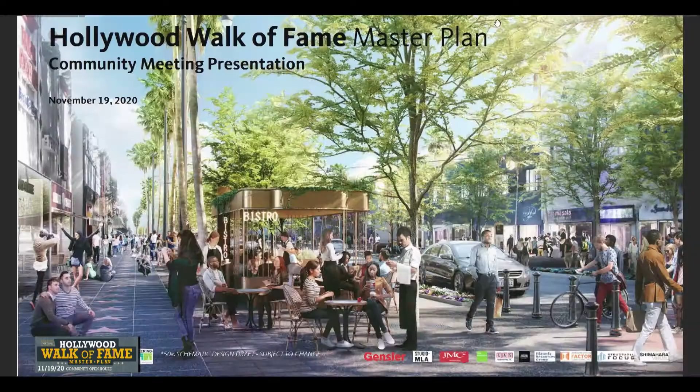It takes a lot of people to work on a project this complex. In fact, it takes a village to make a project like this successful. We've spoken to many people from the city, many people from the community, and everyone is really critical to the project.

Today, we're going to familiarize those who haven't seen this project before with the project, and get those of you who know it better up to date. We'll review the updates and the concept vision in the first two sections. Then we'll talk about traffic and mobility, the street design, the street trees, and the amenities and furnishings in our presentation to follow.

So first, a little bit about the project. What's this project about? Well, this project is to improve the Walk of Fame experience for those who live in, work in, and visit the area. And it is our firm belief that because the public streets are so important in our city and serve a multitude of uses, the street must be a place for everyone.

As mentioned, community engagement is really a big part of our project. Our ideas need to reflect your ideas. We've had 5 focus group meetings to date. Dan, I think, has led over 90 roundtables, and this is our second open house.

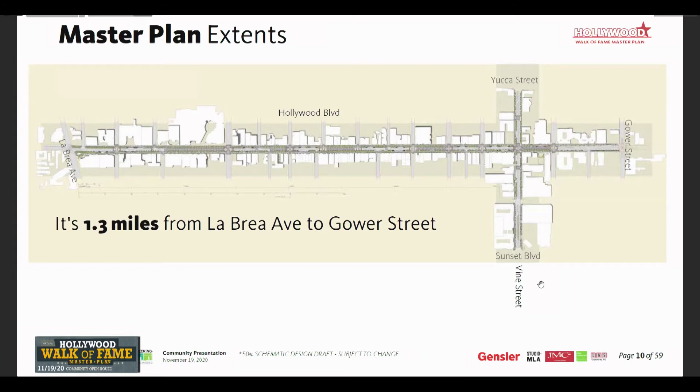So let's take a look at the vision, just rewind a little back to the concept phase. We can see that the master plan extends the entire Walk of Fame from La Brea to Gower and 3 blocks on Vine. Our analysis of the existing conditions, history, and community engagement led us to create project principles.

And the project principles serve as the overarching goals for the project. For the project to be a success, all of these must be met. So the first is creating a unique identity of Hollywood. This is a really great street, an unusual street, a great place.

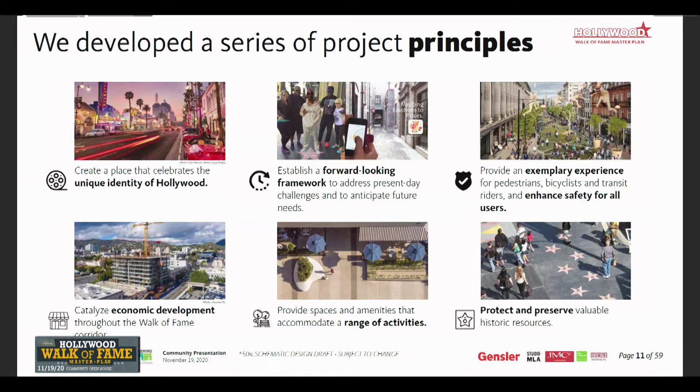We're going to establish a forward-looking framework addressing present-day challenges and anticipating future needs, which this pandemic is just one of. We're going to provide an exemplary experience for pedestrians, bicyclists, transit riders, and enhance safety for all street users. These improvements will catalyze economic development throughout the Walk of Fame. The spaces and amenities that you will see will accommodate a range of activities and a range of users. And finally, we respect the historic monument that the Walk of Fame is for the city, and we're going to protect and preserve those historic resources.

This brings us to a vision for the master plan, and our key concept is, again, more space for people. Currently, the sidewalk's very crowded, almost impassable in parts. And when we look at that entire public right-of-way of 100 feet, now only 30% is devoted for people. We're proposing to change that. What if we can devote 70% to people and 30% for cars?

We're considering widening the sidewalk so that it transforms the parking lane into a people's space, and by transforming one lane in each direction of traffic, we can also have a mobility lane.

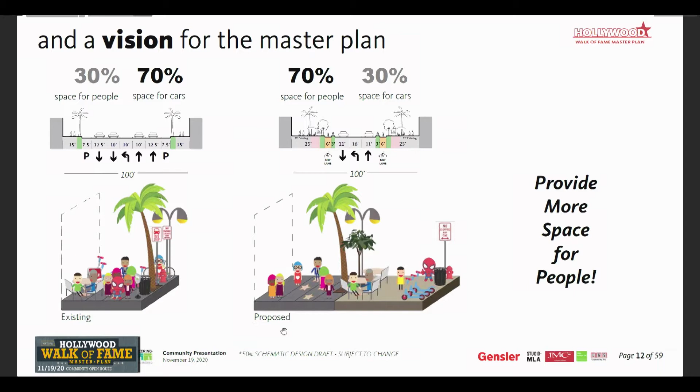So we think this is very achievable, because what we've seen is there is great capacity for change. For instance, the street parking only takes up 2% of the parking in the district, so using that for people instead of parking would not have much of an impact.

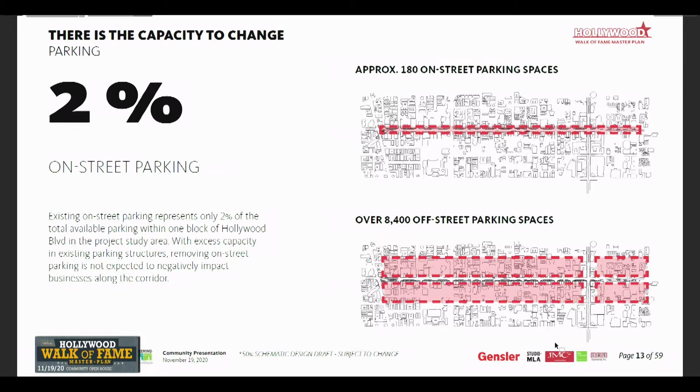And then all this additional space for the sidewalk can be used for alfresco dining, performances, or other things appropriate for this community. The new street furnishings will reflect the Art Deco style and the golden age of Hollywood, referencing the great Hollywood history.

Thank you, Claudia. As you could tell from Claudia's description thus far, community engagement has been baked in to every aspect of this over the past year and a half, and that will continue until we break ground on the first phase. That's been very important in crafting this vision. So please lean in and be part of this if you haven't already joined as this project moves forward.

And as the project is refined, one of the questions on a lot of folks' minds is regarding traffic. We have some encouraging data on that front, and to present this information, let's welcome Joe with Sam Schwartz Transportation. Joe, please take it away. Great, thank you Councilmember, and hello everybody.

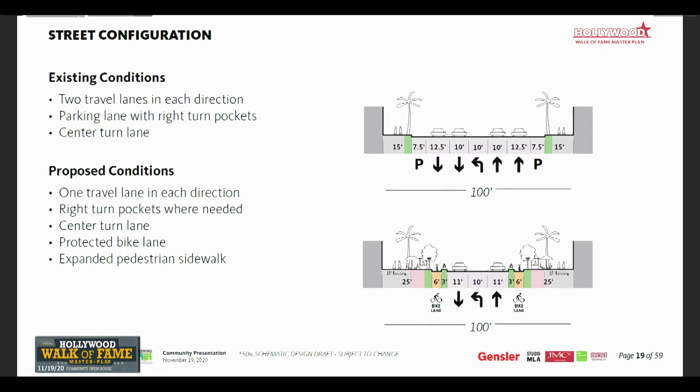In concert with these changes, LADOT has set up an analysis called the Lane Reconfiguration Guidelines that we followed over the last year. The focus of that analysis is a completion year of 2025, and this includes vehicle volumes generated by planned developments. This also includes traffic counts and inputs that were pre-pandemic. As you can see, we've analyzed about 19 intersections as part of this.

The way this reconfiguration guidelines works is that any time we see a vehicle threshold of 750 vehicles per hour per lane for the build condition, it generates a deeper analysis. So on Hollywood Boulevard, we looked at 9 intersections, and what we found is only 3 of those 9 intersections exceeded that threshold. Those intersections that exceeded the threshold are Whitley, Vine, and Argyle.

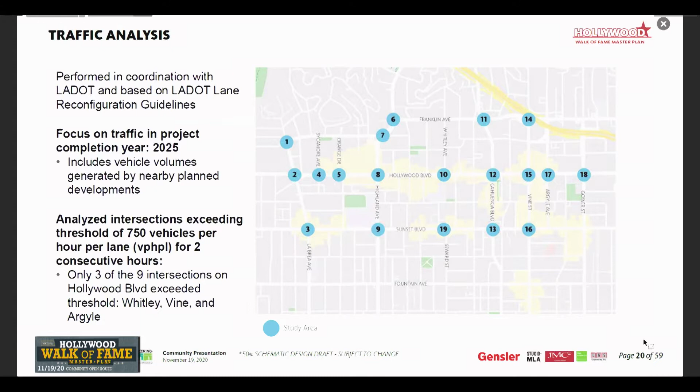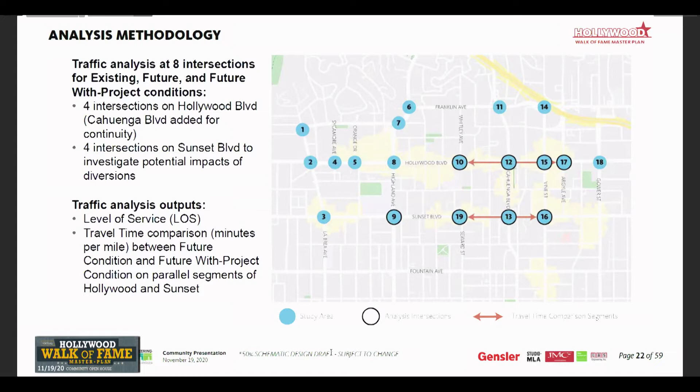For those analyses, we looked at 8 intersections for future and future with build conditions, including 4 intersections on Hollywood Boulevard. Cahuenga Boulevard was added for continuity, even though it did not exceed that threshold. Then 4 intersections on Sunset Boulevard, where we could see the potential for some minor diversion of traffic currently on Hollywood Boulevard that would go on Sunset Boulevard. I'll show the detailed results again, but as you can see, it's a small portion of the corridor that we analyzed with future conditions in a deeper way per the LADOT reconfiguration guidelines.

The other thing we identified as part of this plan is the regional access to the area. This is something we've heard a lot in our community stakeholder meetings, identifying where the volume is coming from and going to. The one thing I want to point out first, when you look at the east to west traffic here on Hollywood Boulevard, this further proves the point that this street does not operate as a through street compared to some of the other boulevards that run throughout Los Angeles.

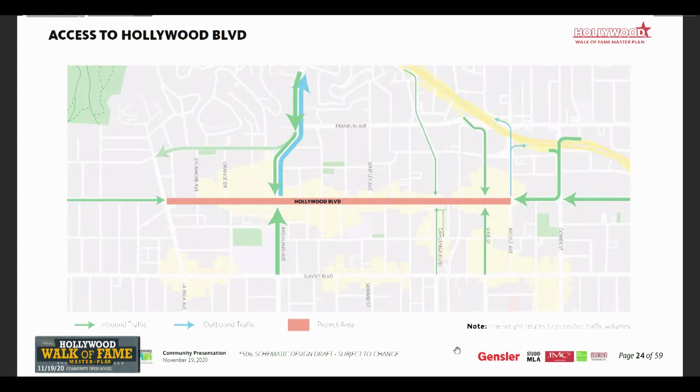I want to identify that first, and then the other thing is that due to the multiple exits and entrance ramps onto the 101, there are multiple access points to the boulevard, and we can take advantage of a very tight grid in this area as well for distributing traffic.

We're starting to look at a curb management strategy, and we're coordinating with LADOT along the way to identify that there will be some limited spaces for pullouts on Hollywood Boulevard, but for the most part, we want to identify how we can use those side streets and adjacent streets for a lot of that heavy loading and unloading activity.

Again, similar to the parking, we want to ensure that the street serves the functions for this transformation to make the street safer and designed for people. As part of that, we're going to be integrating a full curbside management strategy that works for the corridor, works for the businesses, works for all the visitors trying to access in a comprehensive manner. So with that being said, I'll turn it back to you, Councilmember.

Thanks, Joe, it was great. A question for you: is it safe to say that even with the proposed lane reduction on Hollywood Boulevard, the traffic study shows the effects are not expected to be adverse? That's correct.

There will be traffic impacts, but what we're seeing because of the function of the street and its relation to the rest of the city, the traffic impacts, and currently how people use it, the impacts will be manageable.

As Joe said, this data just looks at the traffic impacts only, separate from the overall approach, which is really important. We want a clear-cut picture of the data impacts so we can anticipate them as the design moves forward. But it's also important to remember there would be impacts with or without a project. Traffic will only increase either way. That's one of the takeaways from this presentation.

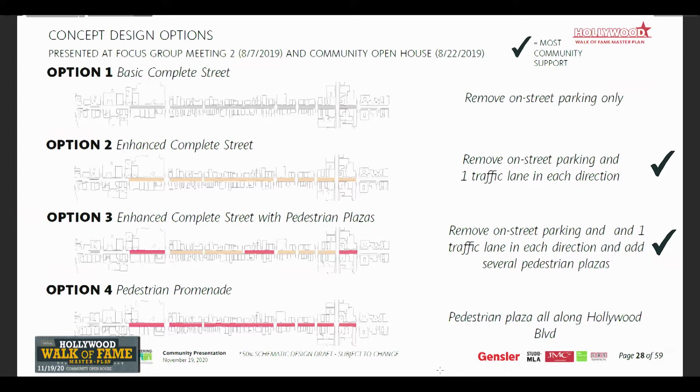When we met during the community meetings and open house during concept design, there was collaborative consensus on creating two major conditions, or two types of streets. Very similar, exactly as Claudia described: basically reducing or getting rid of parking lanes and one lane of traffic each way, creating what we call an enhanced complete street, which I'll get into in a bit. And then peppering within that the pedestrian plazas that could be flexible, used both as streets but at times used as spaces for community events and gatherings.

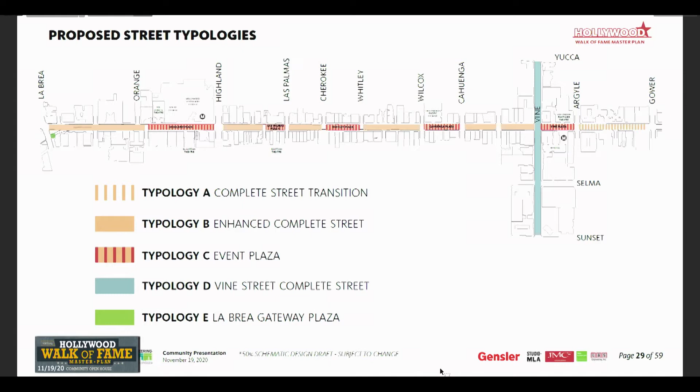That brings us to where we are today. The flesh-colored, lighter beige parts are where we have a complete street, and the red candy-striped parts are where we're proposing flexible pedestrian plazas. These plazas actually function as streets, but we're providing provisions that allow them to be cordoned off into pedestrian spaces where certain events, whether a market or a community film festival, could take place in the street. We already have this happening for special events.

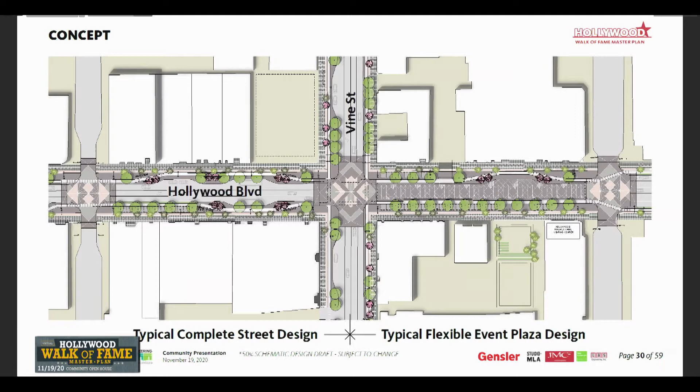This slide shows in more detail those two major conditions: the typical complete street on the left and the flexible event plaza on the right. This happens to be taken at the intersection of Vine and Hollywood. There will be protected slow mobility lanes for bikes and scooters, and we're looking at a special plaza pavement for these flexible plazas, which will have retractable bollards that can be put up or down depending on whether we're using it as a street or temporarily cordoning it off for a special event or community event.

This is an enlarged drawing of the complete street. We think this will be a wonderful way to organize the street better so we don't have conflicting forms of mobility. Anybody who lives in this area, as I do, knows we have bicycles, skateboards, and scooters all in this narrow 15-foot wide piece of sidewalk.

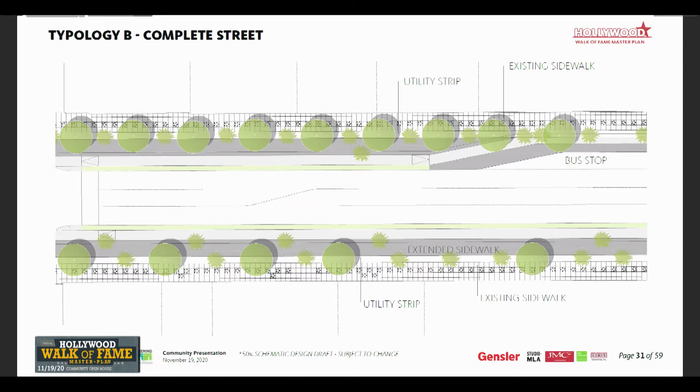We are now expanding that pedestrian sidewalk by 10 feet. We're providing a generous 6-foot wide bike lane with a 3-foot buffer and protection inboard of that, and then our 3 streetcar street lanes, going back to the same condition on the other side of the street. This means increased space for people to walk, to mingle, for outdoor dining, and also a very nice experience for cyclists, scooters, and skateboarders, so they can share in this experience without disturbing the pace of pedestrians on the sidewalk.

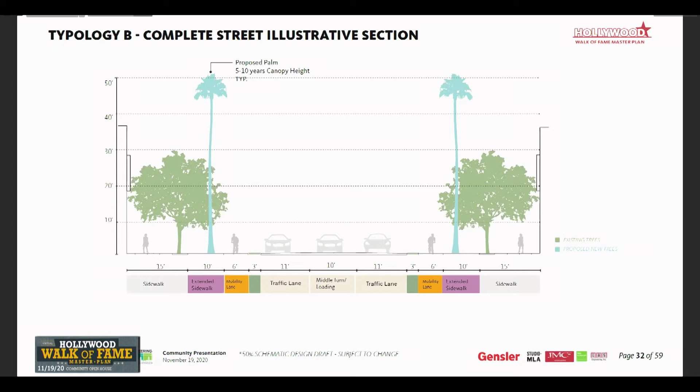Looking at the two ends of Hollywood Boulevard, east of Vine or west of Highland, and in the mid-bit between Highland and Vine, we have a lot of shade trees, and we're looking at adding palm trees on an extended sidewalk to continue the impression people have when visiting LA of rows of palm trees down Hollywood Boulevard, while using the existing shade trees to continue providing shade along this pedestrian-oriented space.

In the flexible plazas, we are looking to use granite pavers to create patterns that are more decorative in nature, so that when this is used as a space, it really gives the character of the space more of that of a room.

We continue to have bike lanes and expanded sidewalks. And in certain cases, we'll have drop-offs or bus drop-offs cut into that extra zone of space that we've taken from the parking areas.

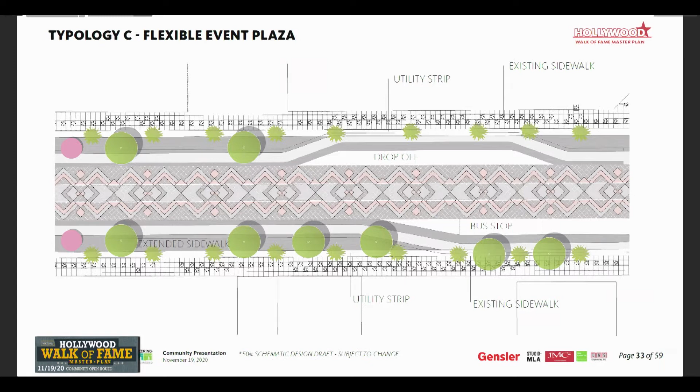Next image, please. East of Vine and west of Highland, we have an existing row of palm trees there, which are quite celebratory. So we're looking at using new shade trees, shown in light blue, strategically located to provide shade to this area so we can encourage the gathering of people without them necessarily being in the hot sun on a summer day.

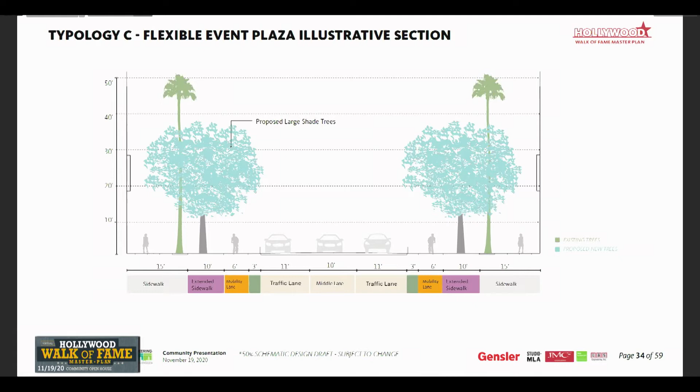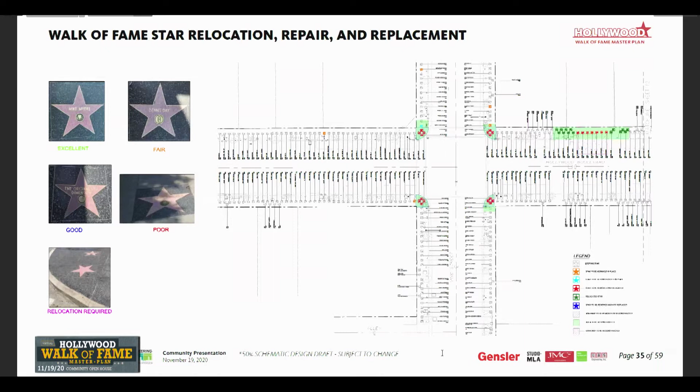Next image, please. We are also going through an exhaustive process of cataloging every single star on the Walk of Fame to understand which ones are in good shape, all the way to which ones need to be repaired. This is part of the scope of work, to repair, upgrade, and restore the existing historic resource of the Walk of Fame. This is part of the project as well, and we have a catalog of every star all along the boulevard and on Vine Street.

Next image, please. One of the things we're proposing here, on both the complete street condition and the flexible pedestrian plazas, is to create what we call a zero curb detail, where the sidewalk and the street are seen as one complete, uniform surface, which allows us to treat it very flexibly and use things on top of that to designate the areas where people walk or where cars go.

Next image, please. So we're doing something similar here in the flexible plazas. In the choice of materials, we're looking at three things: the color hue being complementary to the existing dark terrazzo on the Walk of Fame, being able to use pervious paving where we can to help with water management, and durability.

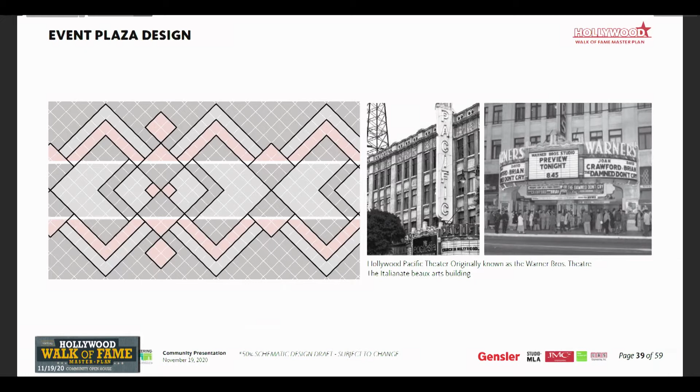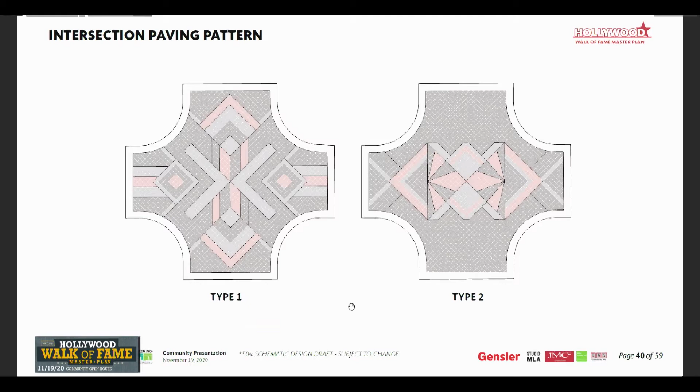Next image, please. And that's it. Thank you very much, it's been a pleasure.

Thank you so much, Lee, especially as a resident who lives literally right there in the middle of where all of this will be—your observations are very helpful. Now, clearly you've looked at other streets in the U.S. and around the world. Why do you feel it's so important to borrow from some of the themes you've seen implemented in other major cities that are applicable to what we can do in Hollywood?

Well, I'm glad you brought that up, Councilmember O'Farrell. We did look at a lot of streets—we didn't have enough time to show them all here—but some of the obvious ones discussed among the team and with the community in the concept design phase were the Champs-Élysées, the Ramblas in Barcelona, Oxford Street in London, and even Nanjing Road in Shanghai. We even looked at some others beyond that.

And they all shared several common components. One is the 70/30 split—that is, 70% for people space and 30% for automobiles. That's actually a pretty consistent metric among all those well-known pedestrian streets.

The other thing is they also started to create pockets of green and trees so they could provide shade, which would encourage people to not only walk along the streets but also rest and partake in community or neighborhood activities.

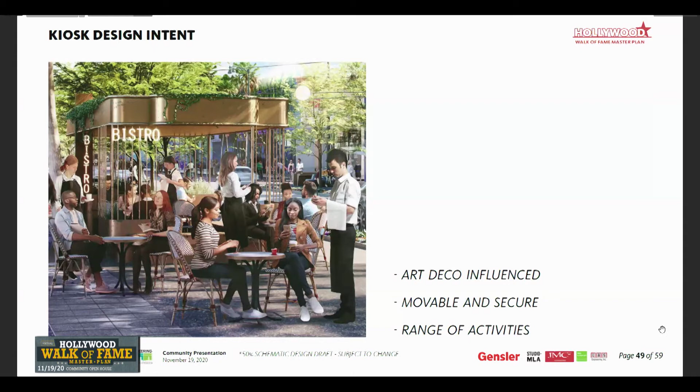On the next slide, you can see how we're progressing the design of that dining kiosk. These are open air. They have a trellis on the top. You can see we're planning on planting some vines that intertwine with the trellis. There's some permanent seating and some movable tables and chairs for maximum flexibility, and we're planning on having roll down grates that lock for the off hours.

I guess you can imagine like twinkle lights up in the trellis and candles on the table, having a great place for dinner before or after you see a show on Hollywood Boulevard.

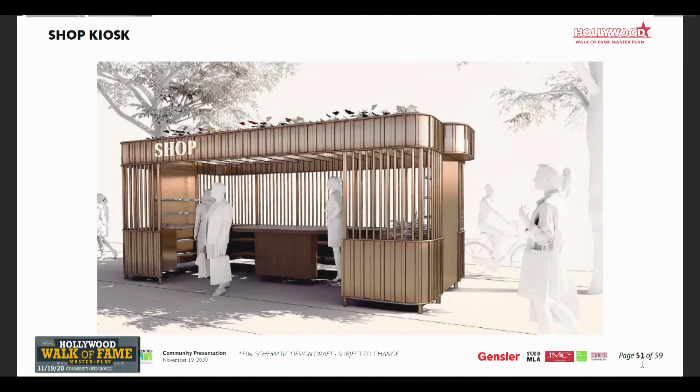And the next slide, you see we're taking that same idea and carrying it over to a retail or shopping type kiosk that extends the range of the retail out onto that extended sidewalk. There's shelves and tables in there to put the wares on, and again this would have a roll down grate, and it would just help activate and have more activity out there on the extended sidewalk.

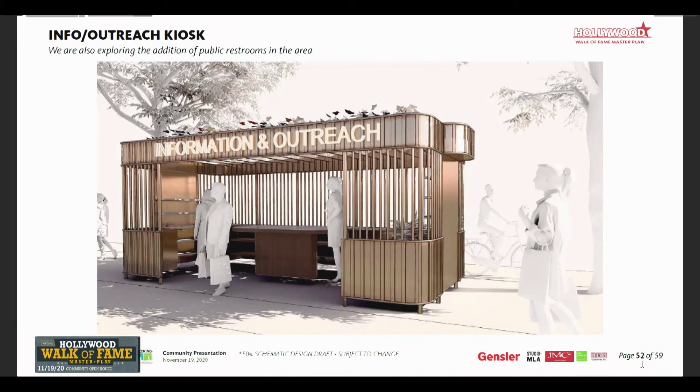And here you see a similar kiosk that could be for information and outreach. You could have a couple of docents in here where you could get information about the Walk of Fame, maps, information about where to eat — all that kind of visitor center type activity could be put in an information and outreach type kiosk. All these kiosks are about 20 feet long and 8.5 feet tall, and they're planned on being factory built and brought out to the site and placed wherever desired along the Walk of Fame.

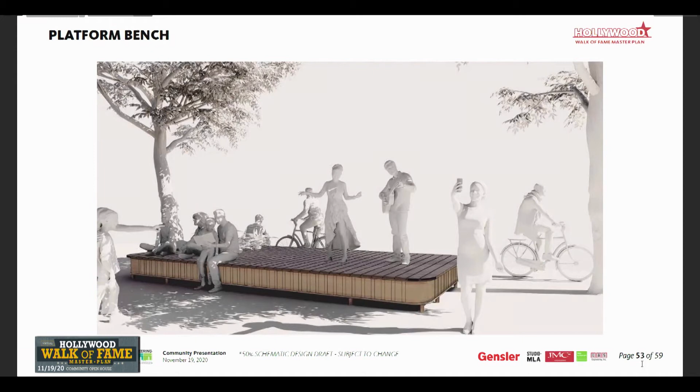Next slide. And then here you see we have an idea for a platform bench, which is in the same footprint as a kiosk, but it's only 18 inches tall. So it's perfect for sitting on under a shady tree, and they're big enough that you could have a small performance or a band play or have a speech happen on top of the platform bench, which could enliven the streetscape even more and promote that performance spirit that is Hollywood.

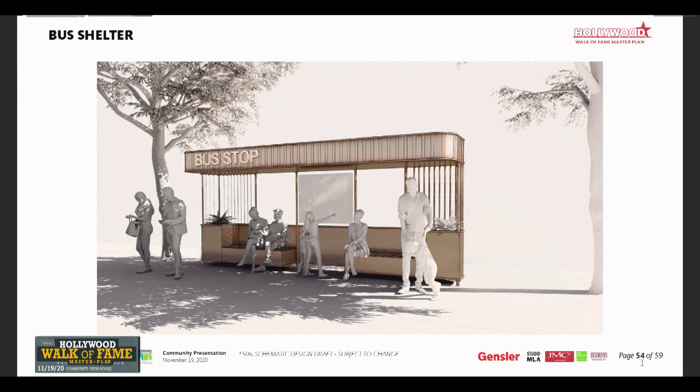And then we have the idea to have a bus stop design in the similar vein aesthetic as the other kiosks, just to give you some sun protection and some rain protection while you wait for the bus. And this view is looking from the street side where you would get off the bus.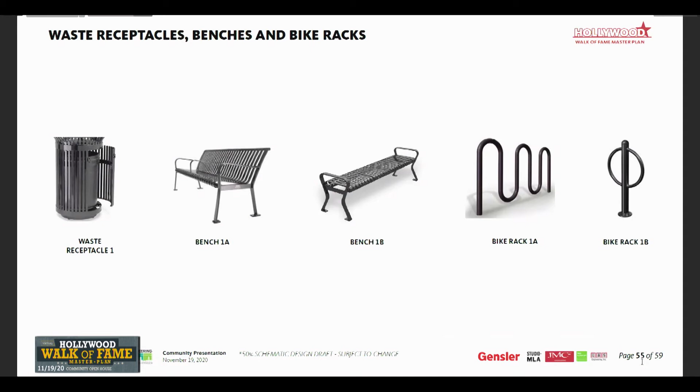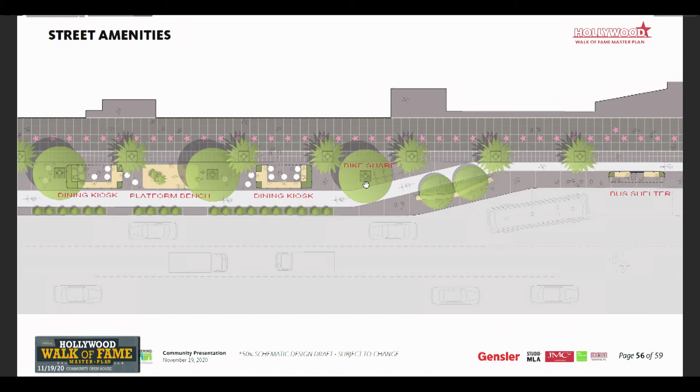And with that, I will turn it over to Claudia so she can go through some of the project benefits of the project overall. Thanks, JT.

So in closing, we're really excited about this streetscape. We think it will totally change the environment on Hollywood Boulevard and provide a lot of benefits to all the members of the communities. The expanded sidewalks will provide 65% more space for people and amenities.

We'll be adding up to 600 new street trees. As Councilmember O'Farrell said, this is really a huge benefit for our natural environment.

There will be over 290 stars repaired or restored, really adding to the historic importance of the Walk of Fame. 5 proposed event plazas. Now, these are temporary plazas which can be opened or closed as needed for community events, and that's over 2 acres of open space available to the public.

Enhanced bus stops, and very importantly too, enhancing safety by creating 10 new, more accessible, upgraded crosswalks. And we think in all that the overall improvement for the people who live in Hollywood, work in Hollywood, and visit Hollywood will be immeasurable.